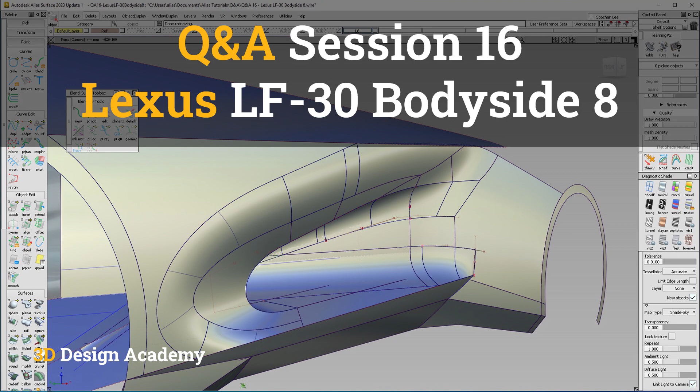In this lesson, we'll continue with part 8 of the body side of the Lexus LF-30 concept car. Okay, so in the previous lesson, I worked on this fillet over here. So let's go ahead and work on this one. What I'm going to do is take a little measurement. I think size-wise, it's pretty good. Let me just check a couple of images. Yeah, I think the size is pretty good for this one.

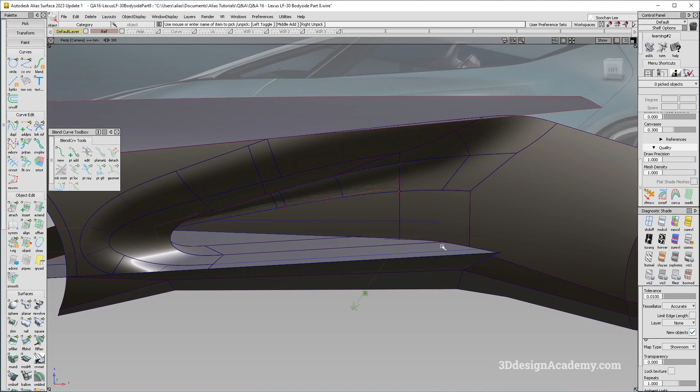So what I'm going to do is rebuild it, because right now you'll see that it's in multiple pieces. So let's go ahead and take a look. The information window shows it's 100 to 150. So that's what I'll do. Let's go ahead and delete this one, and let's grab surface fillet again. I'm going to make sure that this is untrimmed. I know there are several pieces because I was trying to do the fillets over here. Actually, you know what? I'm going to keep them just in case.

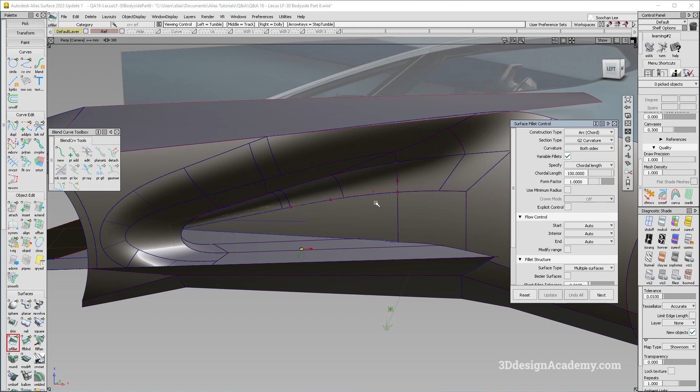First of all, I'm going to get rid of the COS over here. I'm going to grab a surface fillet over here. It's going to be G2 variable fillet. I'll start with 100 because it ranged from 100 to 150. I'm going to grab these surfaces over here and put that in. I'm going to make sure the direction is good. Right now it's set to auto. That's fine. It should actually be starting from here. I think I might have accidentally deselected this one, so let's do it again.

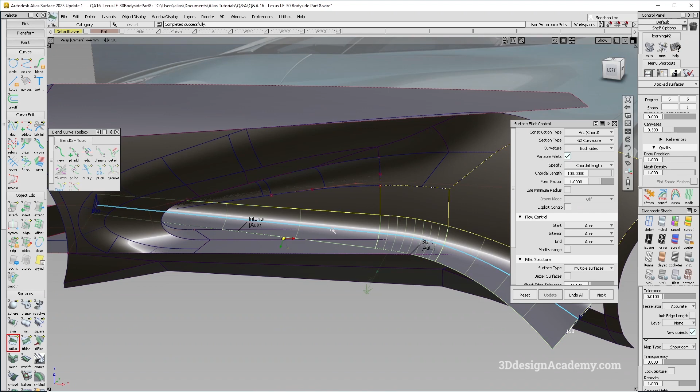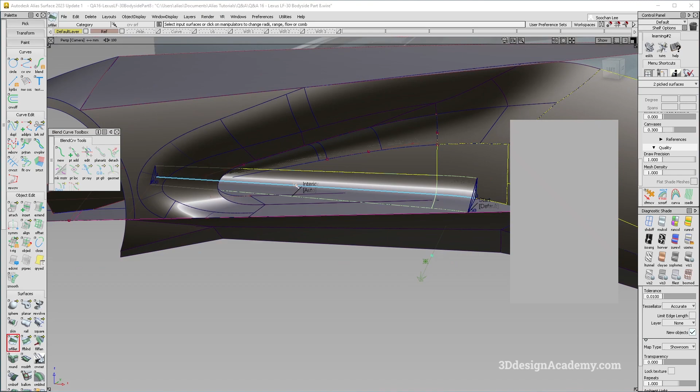Okay, so it's 100 there, and I'm going to put 150 over here. It's set to auto, that's fine. I'm going to change that to default over here, and change this one to default as well. Okay, so now it's one piece. Because I stretched it, and the 100 is all the way over here, I think it's actually a little bit larger, which is fine. I just have to make sure this one works over here.

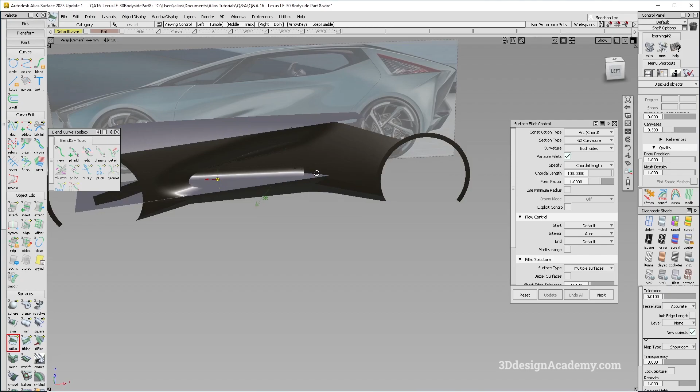Let's take a look. If this size works, I'll just proceed with it. Maybe it's not a bad thing that it's a little bit larger at the bottom. In fact, I might make it slightly bigger. I probably should have put a little bit of crown on this bottom surface. Right now it's probably almost dead flat. That was probably not the best thing to do. But I think it might not be a bad idea to make this one a little bit bigger.

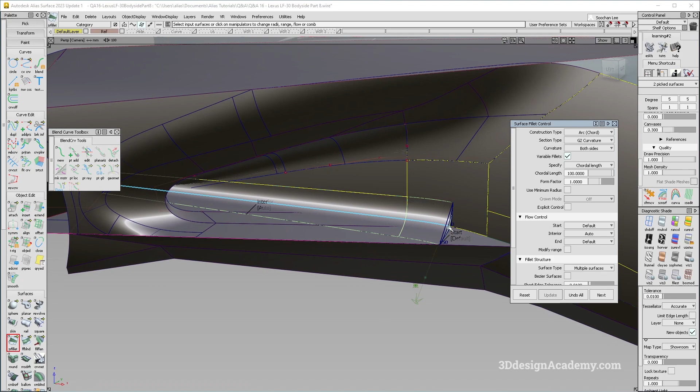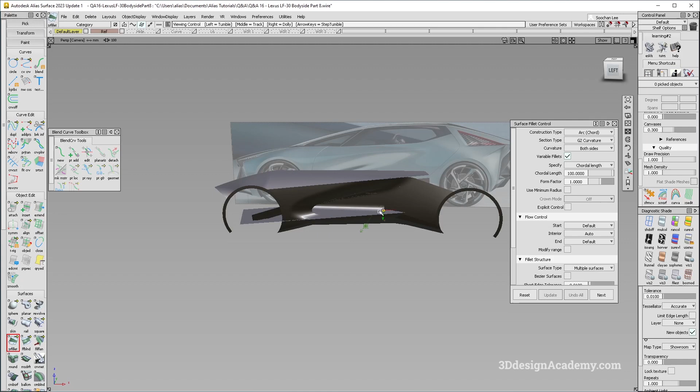I'm going to make this maybe 170, and increase this one to 120 over there. Yeah, I think that's a little bit better. Okay, that looks good. Should I make it a little bit bigger? Because the shader that Toyota uses is not as reflective as this, sometimes this makes the fillet look a little bit bigger. So I'm going to change this to shade sky analysis. Looking at the shade sky, I think this is pretty good, so I'm going to use that.

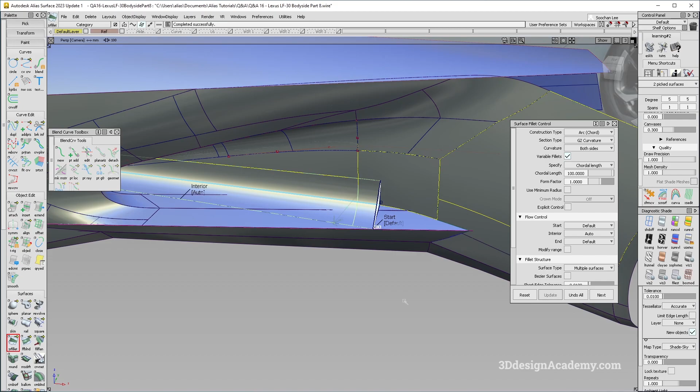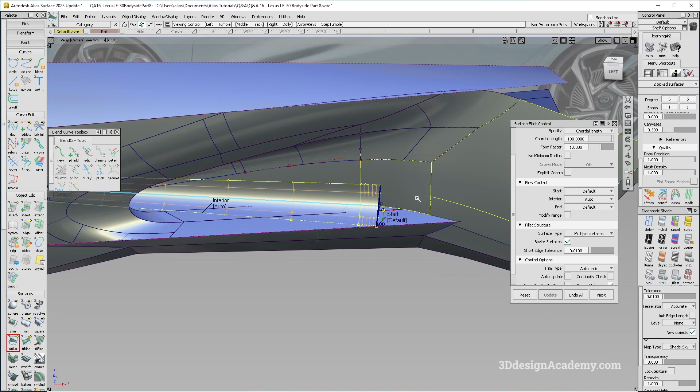Actually, I'm going to make this a little bit bigger, maybe 180 on this side. Yeah, I think that's pretty good. All right, before I start, it's in two pieces, which is good, but I'm going to do Bezier just to make sure the CV structure over here is good. That still keeps it in two pieces, and when I extend this one, that's going to make a better result. So I'll keep it this way.

Let's go ahead and delete the construction history over here. I'm going to extend this piece over here, so I'll just do an extend with merge off.

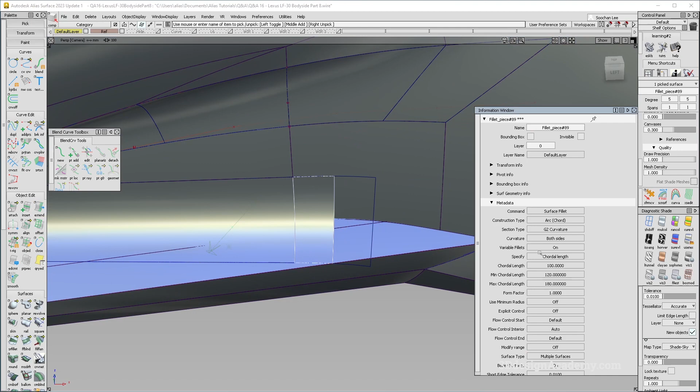And I'm just going to extend this one like that. Ooh, that's no good. Okay, so even with Bezier, looks like it's still stretching in a little bit weird fashion, which is okay. It's just not great. So I'm going to use a little bit different technique.

So first of all, let me just stretch this over here like this, and I'm just going to grab a degree 2 curve over here, and I'm going to align this one over here like this, and I'm just going to make it a G2, and I'm just going to rail it over here. So let me just grab these two over here. And actually, you know what? I think I'm just going to stretch it all the way through here.

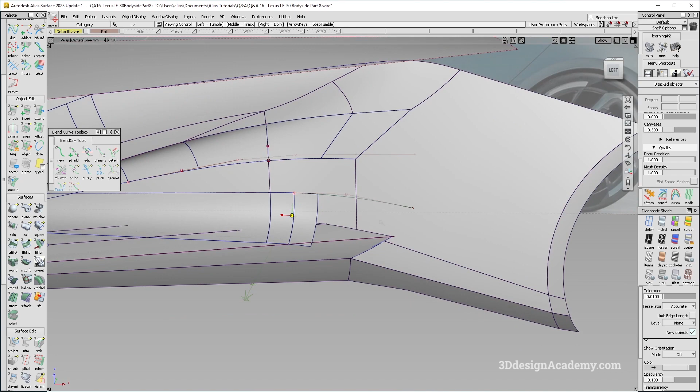Now, because this piece probably needs to be a little bit flatter, you can probably make the adjustment too, or you can just pull the CV a little bit so that it's a little bit larger. You can do that. Really depends on what you want to do. It's really up to you. Now that's it. However, let's go ahead and do this.

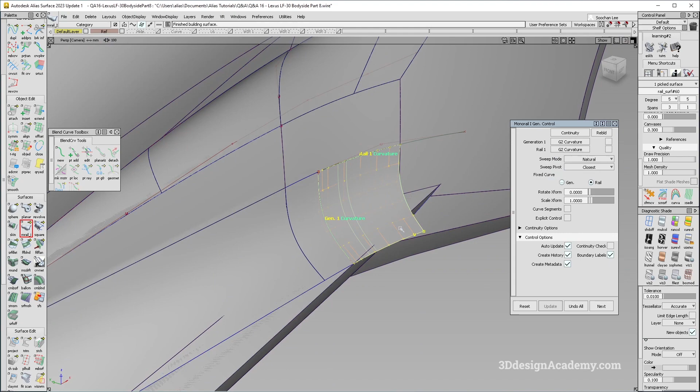So what I'm going to do is, instead of using stretch, I'm just going to do a rail. So I'm just going to grab this one as a position, or gen, I should say. And I'm just going to do that as a rail, and I think that looks good. However, I'm just going to make sure that it's curvature over here. It looks like it's doing a little bit of... I don't think it's continuous right there, so I'm just going to make it a degree 5 on both sides.

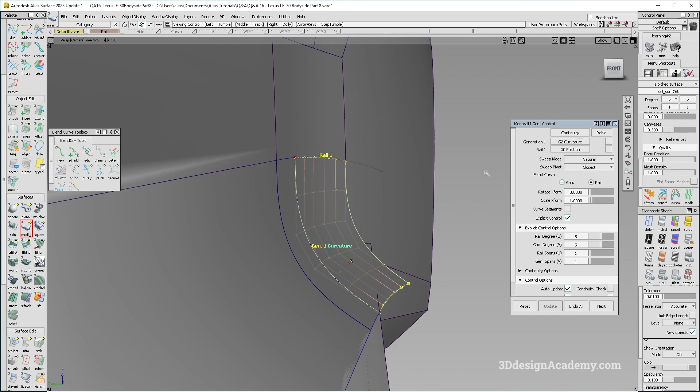Okay, and let's see what the CV structure difference is. Okay, so you'll see that this dips down a little bit. So I think it might be a better idea. Let me just make this both position. I'm just going to set rail as curvature and see how much it differs by. Okay, so setting this up as a curvature over here is good. However, I think this one is starting to deviate a little bit.

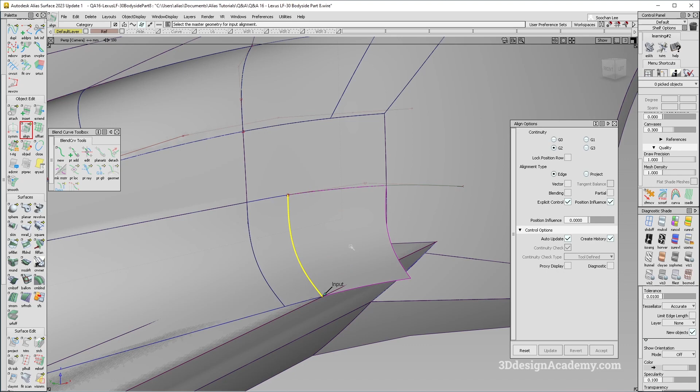So what I'm going to do is I'm just going to grab this one over here, and I'm just going to align it on this side. I'm going to make it curvature, and let's do this. I'm going to say position influence set to max, and I'm going to turn blending on. It's going to be 1, 2, 3. And I'm going to probably have the blend factor of 0 so that everything seems a little bit more gradual. I think that looks pretty good.

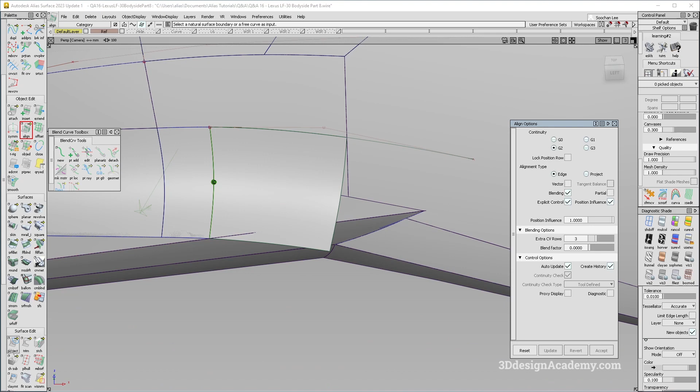Okay, so now what I'm going to do is I'm just going to line this up. Before I line it up at the bottom, I do need to trim convert it. So I'm just going to project it normal like this. And I'm just going to do a trim convert over here. And I'm just going to get rid of this one. And that looks good. And I'm just going to align position over here.

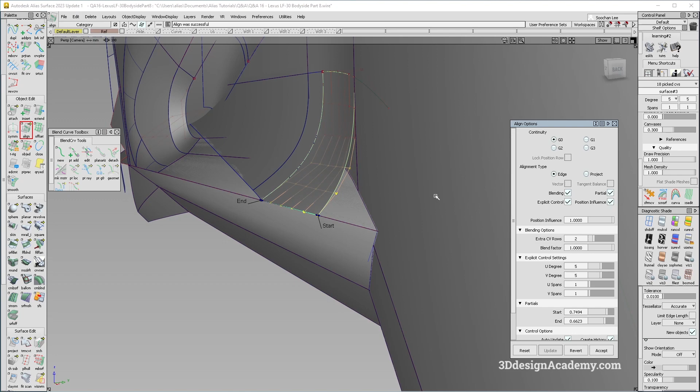Like this, I'm going to say partial. That drops it down. Blending will also need to be turned on. Blend factor extra CV rows of 2, blend factor of 1. And that should be pretty good.

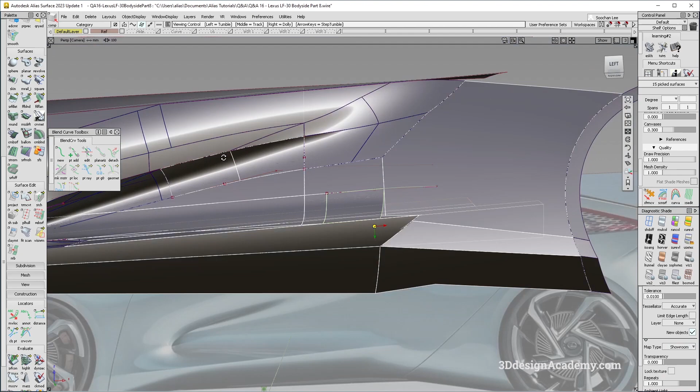Now that's it. However, this alignment wasn't good, so I'm going to, well, actually it was curvature, so yeah, I think this should be okay. Oh, actually, you know what, we got curvature on both sides, and that's good. Highlight looks good. Let's actually go back to showroom. I think that looks pretty good. Okay, so now I'm just going to delete the construction history.

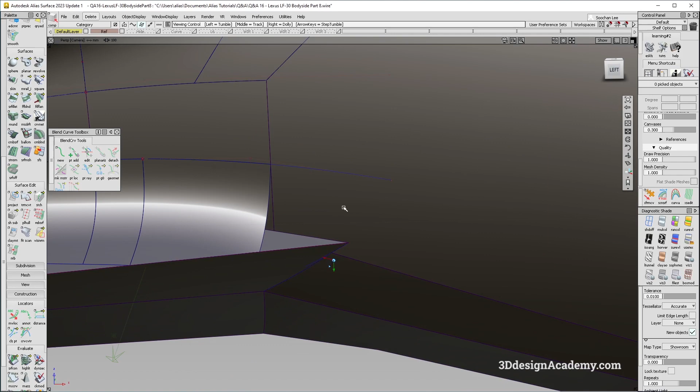Now that's it. However, this piece over here, I can do it hard edge. Actually, you know what, let's figure out the fillet size. Actually, it doesn't look that big. You know what? I think I'm just going to fill that in. However, I will need to do a fillet over here. But let's go ahead and do this first.

So what I'm going to do is I do need to set up a curve for the 4th edge. And I'm just going to snap it over here like this. And then maybe I'll just project it like that.

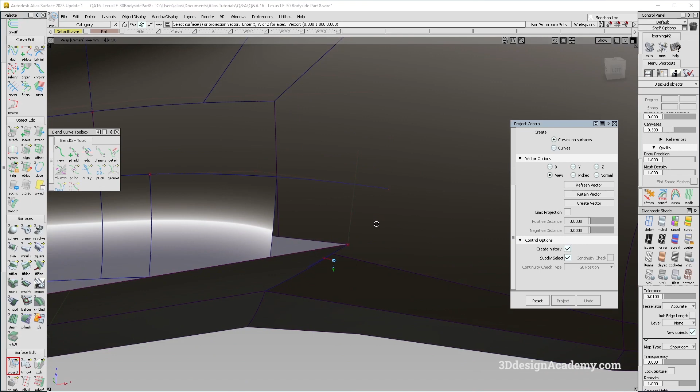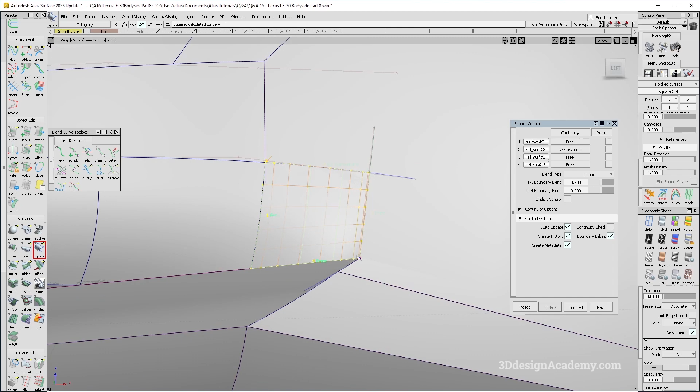I'm just going to say view should be okay. And I'm just going to go ahead and use a square again. So it's going to be 1, 2, 3, and 4 over here like that. Okay, so 2 is going to be curvature. Unfortunately, side 3 will stay positioned because I will need to put a fillet over here. There's going to be a fillet over here, and there is going to be a fillet over here. So side 3 will remain in position.

However, side 2 will be curvature. And let me just turn on explicit control. Oh, that looks good. And 1 is also going to be curvature. Looks like there's a little bit of failure. Free. Oh, actually, I'm going to leave that on. Free boundary. Looks like there's a little bit of a movement, but it's not too bad. So I think it's just a matter of getting those lined up.

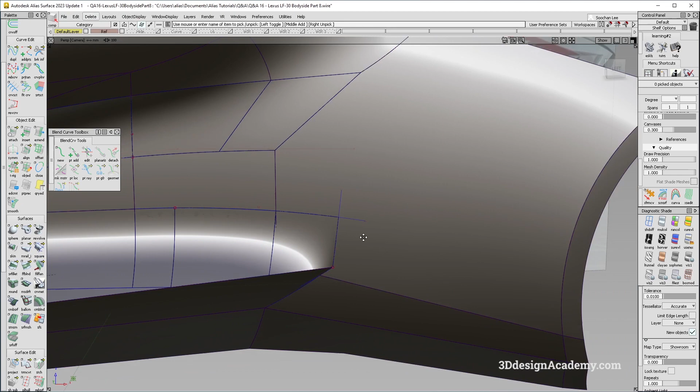I think the highlight looks pretty good, and once I put a fillet over here, I think the transition should be pretty good. So let's go ahead and make sure the continuity is good. So I'm just going to delete the construction history over here, and let's just trim this for now. Now I did separate this over here. I wish it did it with just a line up, but it looks like if you see the highlight over here, it didn't quite do that. So, well, that's okay.

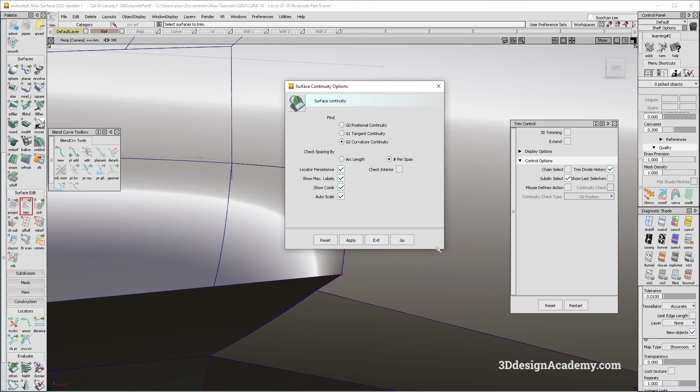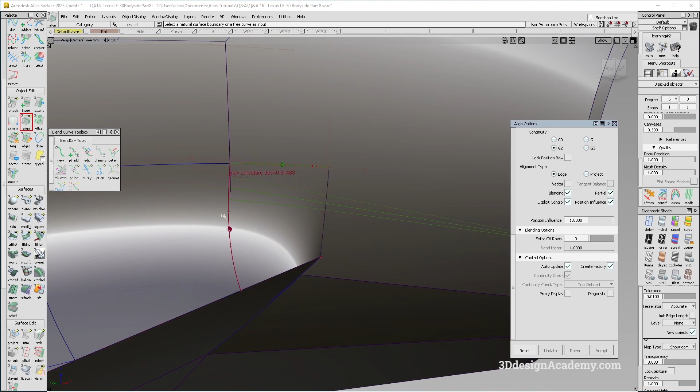So let's go ahead and check, get the surface continuity checker, and I'm going to line it up over here. And here it looks like it's just a matter of getting curvature continuity to be corrected. So let's go ahead and grab align. And I'm just going to start with G2 over here. And that does fail a little bit more. So I'm going to say vector, nope. Explicit control. Okay, so let's try this. I'm going to align this one because it has a little bit more deviation. Okay, so it looks like that might be a little bit better. Well, yes and no.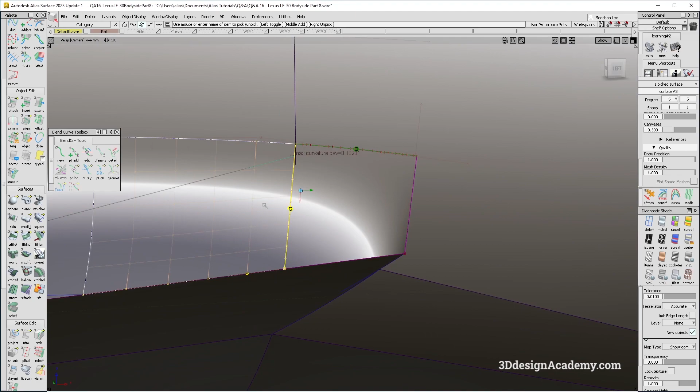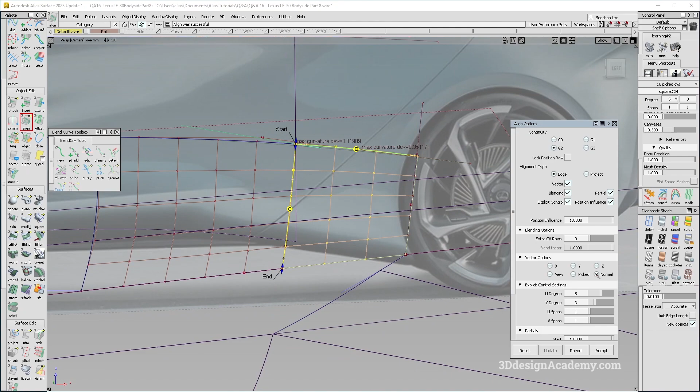So if I have the CV structure like this, which, to be honest, it's not to my liking. Looks like it actually gives me a little bit better structure, but I wonder if it's really worth it to change this. What I could do is I can try to just do a rebuild over here. But, well, let's do this. I'm going to try without. And let's take a look. So I'm going to say vector. Say normal. Saying normal is a little bit better.

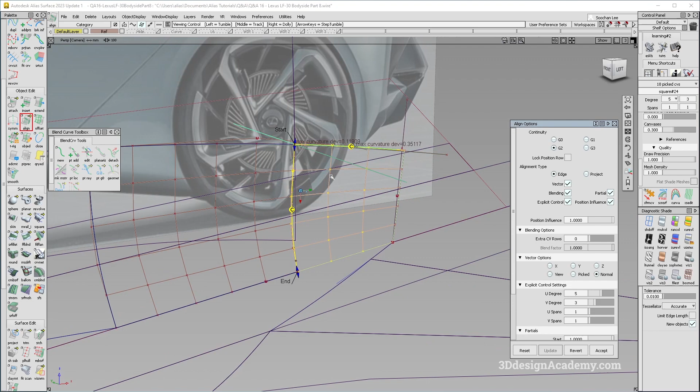Okay, actually, you know what? Before I do that, let me just revert it so that I have a copy. So I'm just going to copy and paste, put it in hide, just in case I need it. And let's go ahead and align this one over here like this. And I'm going to say vector. Okay, and what I'm going to do now is I'm just going to delete the construction history over here, and I'm just going to try to line these up. So first of all, let's do this side first because it's got a little bit more deviation.

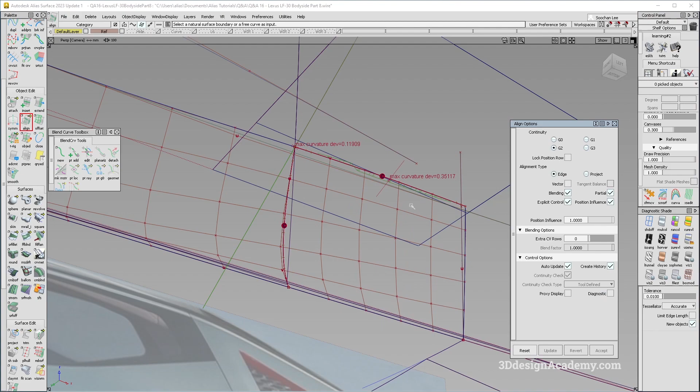Now, of course, I could make it into degree 5. Well, let's do this. Actually, you know what? Let's just do that. Degree 5. Let's make our life a little bit easier. Still should be a good surface over here. Okay, so it's still deviating by 0.6. I'm going to say vector. Nope. That doesn't really have any effect. I'm just going to align this one over here. I'm going to say vector. Okay, so looks like deviation amount is a little bit smaller.

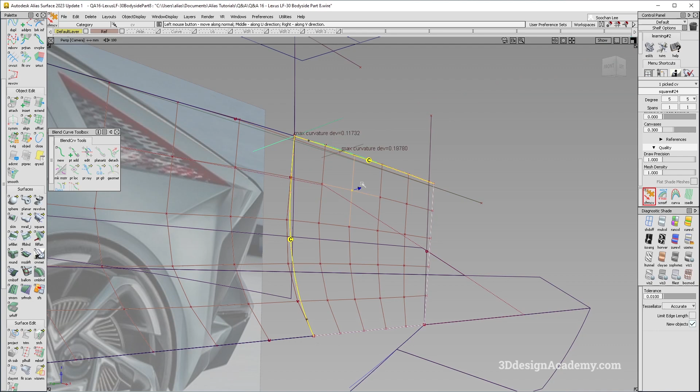So I'm just going to go ahead and delete the construction history. Let's grab this CV over here, and it's going to be NUV. I'm going to say 5,000. Let's just try. Ooh, that's no good. I got curvature here, but it's failing over here. So I'm going to try a little different CV, a little different location. So that's 1.0. Now this probably has to do with the fact that some of the surfaces are a little bit flat. That makes it a little bit difficult.

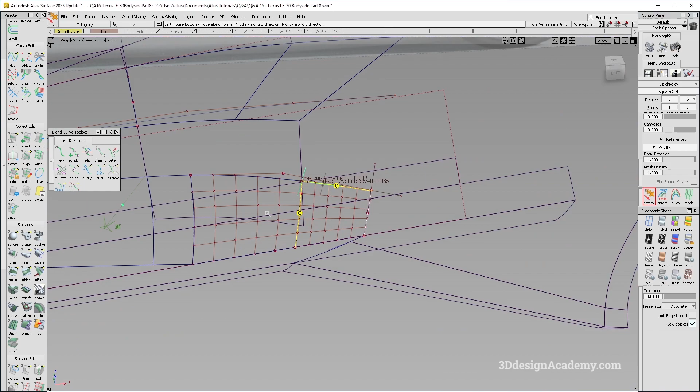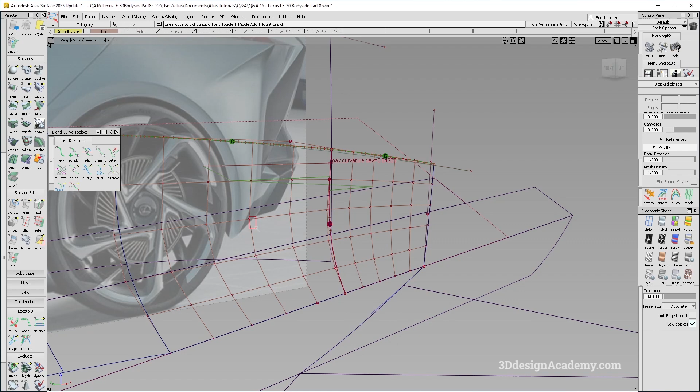Okay, so let's grab the CV and see if I can. Actually, technically, I'm supposed to be aligning this one to this one, because this is essentially a primary surface. So maybe I'll just do that. Okay, so let's align this one first. So you'll see that there is a deviation. So I'm going to just have curvature on over here. I'm going to delete the construction history over here, and I'm going to grab this one. Actually, I should probably grab this one over here. And let's see if this works.

Okay, I got it a little bit closer. But since it's turning to 1.0, I think I probably need to control some of the CVs over here. So let's do this. I'm just going to grab the position over here. It's not really letting me. Okay, so let's grab this one. See if I can make a little bit of adjustments. 1.0.

1.15. Just going to try and grab CVs here and there and just try to get it a little bit closer. So it looks like it's seesawing here and there, which really shouldn't be doing that. It shouldn't just pop to a point. Oh, there we go. 0.12. You see that it just pops right away to 1.0. That's not supposed to be like that.

Okay, so I'm just going to grab this one. You know what? Let's just leave it. I'm going to just pick a couple more CVs to see if I can get it to where it needs to be. But it looks like none are good. Okay, well, it's close enough, I would say. So unless some of the CVs on this side help me get there, let's see. Since it's a little bit sensitive, I'm just going to crank it up all the way to 500,000 and see. 0.12.

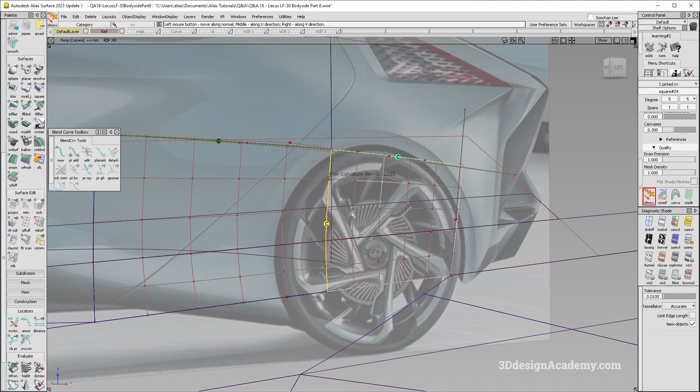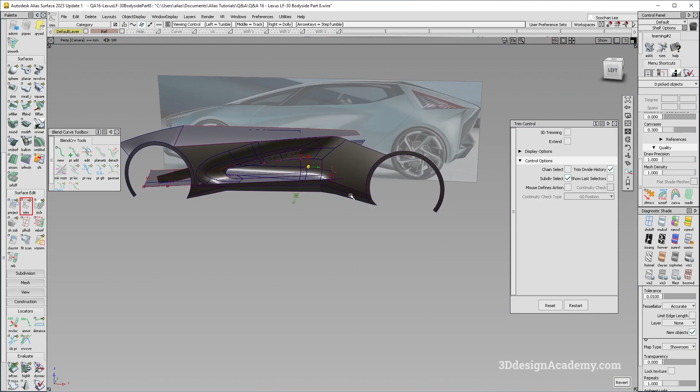Yeah, okay, you know what? Let's just leave it like that. Unfortunately, I think that's about as much as I can get it to. All right, so that looks pretty good. Highlight looks pretty good. So I'm going to go ahead and just trim this piece over here. And next up, I'll probably have to do this one, and also this one.

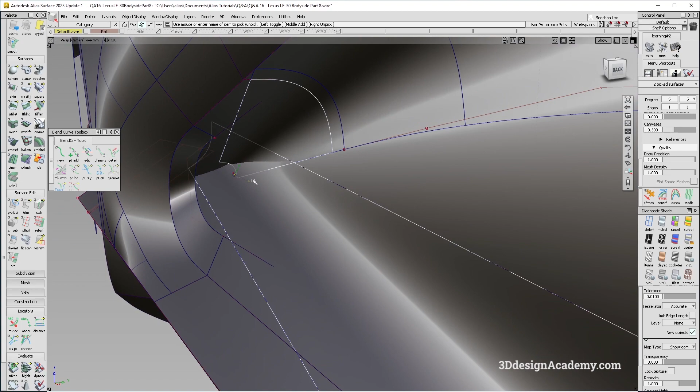Now this is a Y fillet, so it's going to be a little bit complex. But since there is a little bit of size difference between the two, and since this is a lot bigger, I think I'm probably just going to do this on top of it. So instead of doing a traditional Y fillet with different size, I'm going to try to stack on top of it and see how that goes. So let's go ahead and do that.

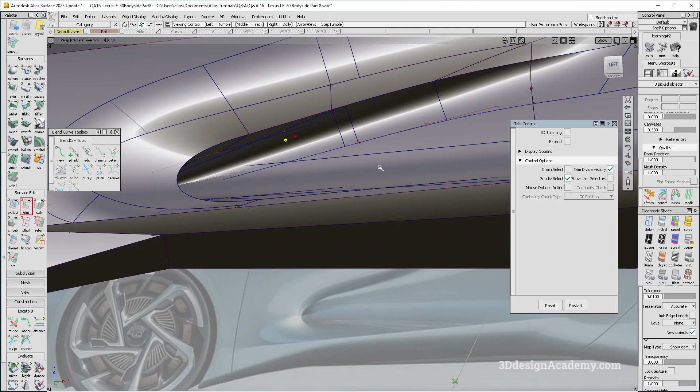So first of all, this one, let's go ahead and just trim it. Actually, you know what? Let's not trim it. However, I do need to trim this, like that. And I'll probably have this just flowing on top of this one. First of all, I'm just going to do an insert. Actually, instead of doing an insert, I'm just going to chop this into two. However, I would like a copy, so I'm going to copy and paste, put one over here. And I'm just going to do detach over here.

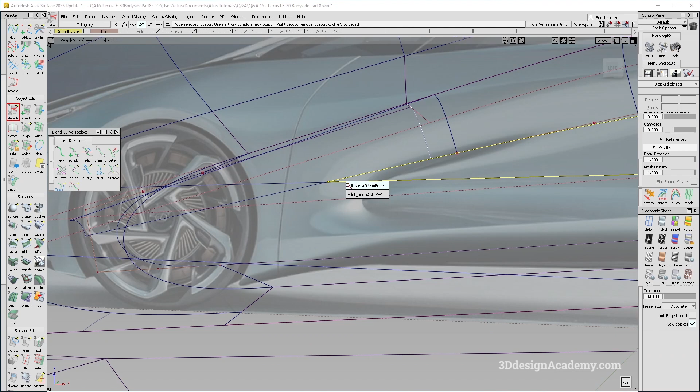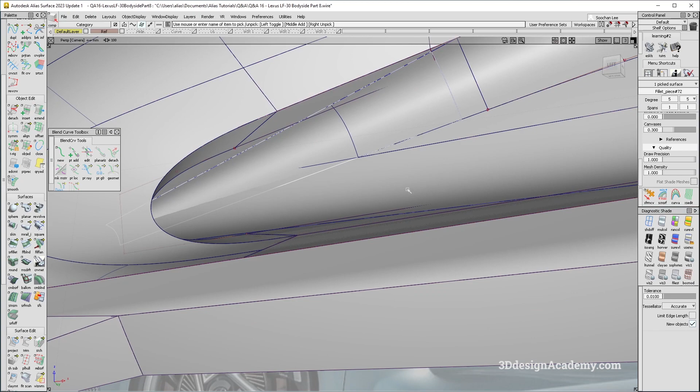Just going to snap it over here. Oops. Looks like it won't snap over here. Oh, that's really annoying. Okay, that's fine. So let's do an extend. I'm just going to turn merge off. I'm going to extend this piece over here up to this point, which snaps. Okay, so let's go ahead and get rid of this one. Actually, I wonder, this does need to climb onto this side. So let's just delete it for now.

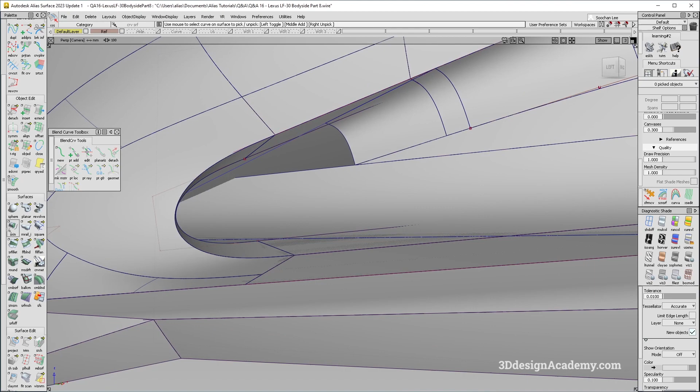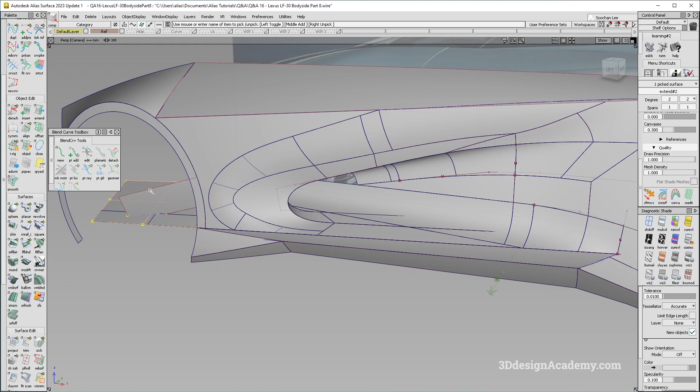I'm just going to grab a surface fillet over here. This is a tricky thing about variable fillets. Because the size is a little bit different as it goes towards the other side, it's going to be a little bit difficult to match everything. First of all, let me just trim this out. So I'm just going to say extend, and trim that. This piece over here I no longer need, so let's just go ahead and hide it. Same thing with this one. This one, hide it. And let's take a look at this one.

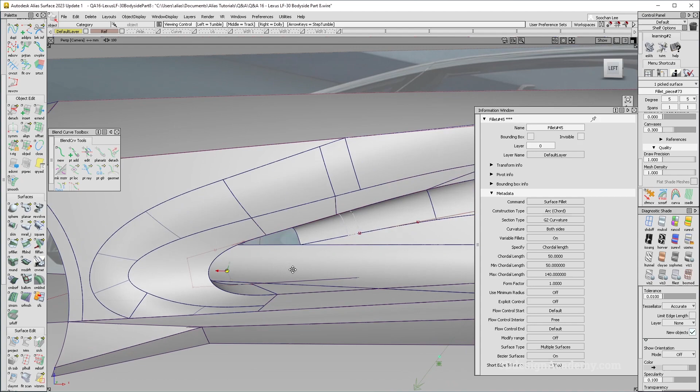So what I'm going to do, I probably should have built this one as, well, let's see. So this one, okay, so it's a 50 and 140. Let's see if I can replicate this. So I'm just going to grab these ones, including this piece over here, and I'm just going to see if I can just reenact it. So I'm going to say copy and paste, 50 and 140.

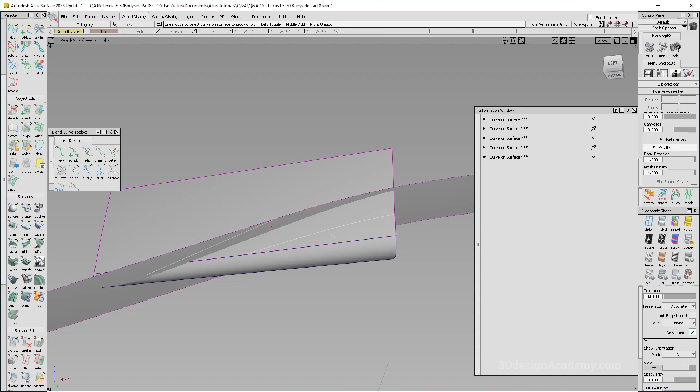So I'm just going to untrim this piece over here like this, delete all the COS, say variable fillet, grab these ones over here. So variable fillet, I'm going to say 50 like that, and it's going to be 140 on this side like that, and that's what I get. Now my question is, is this going to be the same shape? I'm not sure. So first of all, I'm just going to turn Bezier surface off, and that looks a little bit ridiculous to be honest.

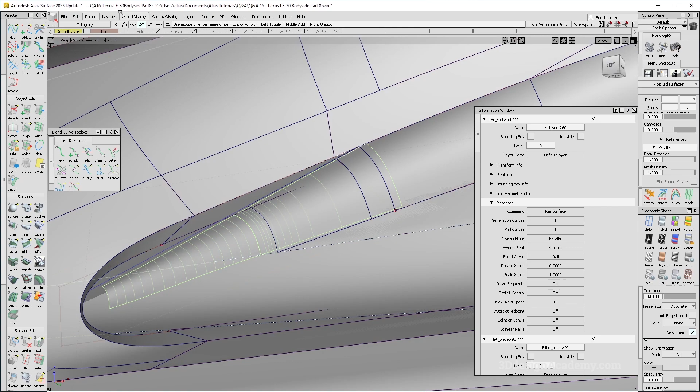However, what I'm looking for is just a path. So I'm just going to see if this matches the profile of the one that I built previously. And looks like it doesn't. So what I'm going to do is, unfortunately, this makes it quite a little bit more complicated. I'm just going to delete it. And I think I'll probably have to just manually build it. All right, so let's do this.

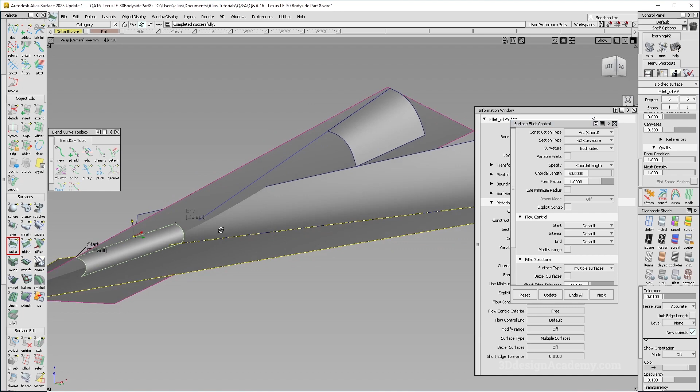I'm just going to set up a fillet over here. Let's do this. I'm just going to do a surface fillet over here, and I'll probably just match it over here. So I'm just going to make a 50 over here like this, and I'm going to see how it does with a fillet. Oh, actually, not exactly a fillet, just a blend curve. So I'm just going to do this one over here, do this one over here.

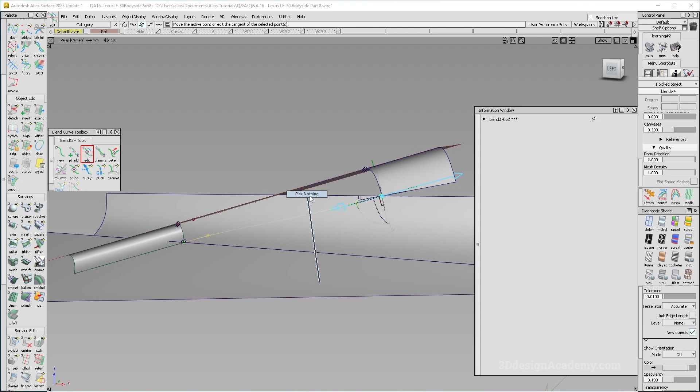If the flow seems natural, that's good. But as you can see, it's not. So I'll have to do a little bit of adjustment there. So I'm going to do the same thing over here. And let's just do an edit over here like this. Oops. And as you can see, the CV structure is going a little bit different place.

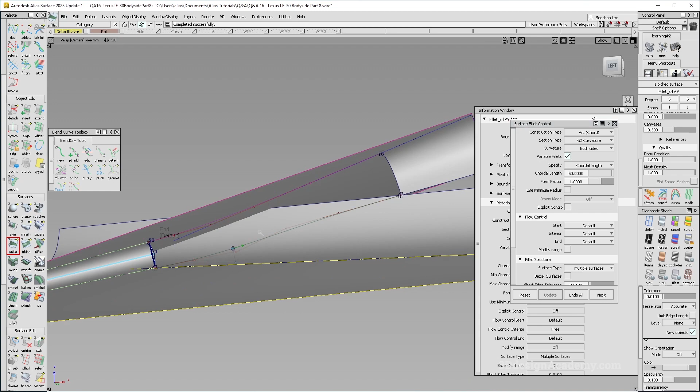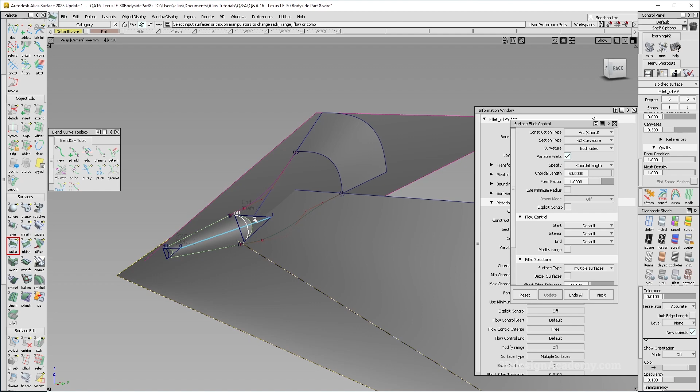So what I could do is I can do a variable fillet on this one too. So maybe I'll do 50 there, and maybe I'll just make this into 30 like this. And I'm just going to try to get the structure to be somewhat similar so that it flows nicely. Now it is going to be like this on this one, just because of the imbalance I have. Actually, if this is the case, I'm wondering if it might be better to just, you know what? I think it might need to.

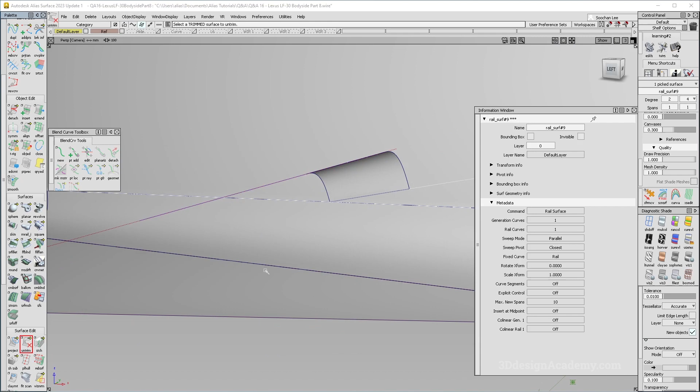Okay, so let's just delete the curves over here, and I think I might have to just go back to the theoreticals over here. So I'm just going to grab this one, this one, this one, this one, this one, and this one. So these surfaces over here, I'm going to say hide unselected. I'm going to say untrim. So basically get back to the theoretical on this side, and get back to theoretical on this side like this.

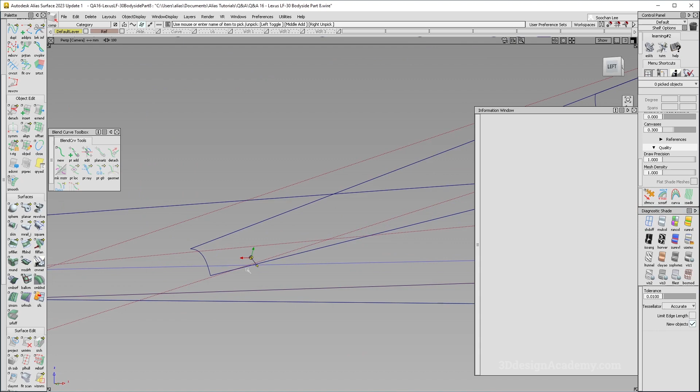And now I'm just going to bring the original fillet back, and let's grab this one. I'm going to put it back in here, and I'm just going to see where it ends up. That's where it's going to be placed. So let's go ahead and extend this one back a little bit. And I'm going to make a fillet. Actually, let's put this in a new layer and just hide it temporarily. And I'm just going to put a fillet over here that's based on this size. So that's good. The flow is going to be good. Now I don't know how this is going to work, but let's take a look.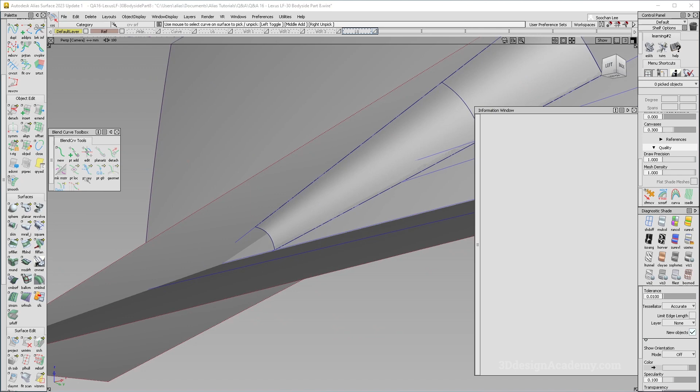So let's see, I'm just going to do an intersect over here. It might be a little big. Let's take a look. So what I'm going to do is I'm just going to duplicate this edge over here. It looks like it's just a flat surface, so the intersection is also flat. I'm just going to place a curve over here. And basically that is where the curve, or the tangent line, is going to be. So I'm just going to project it there.

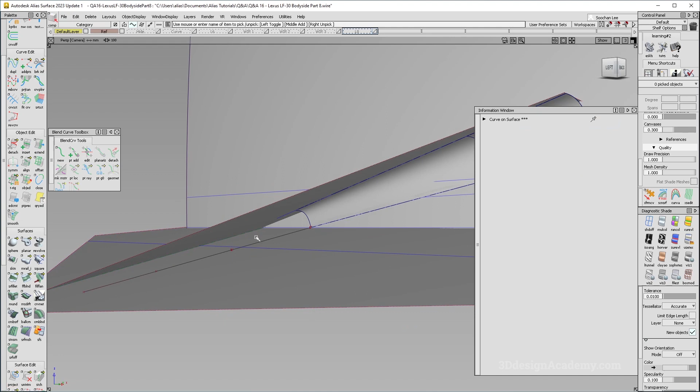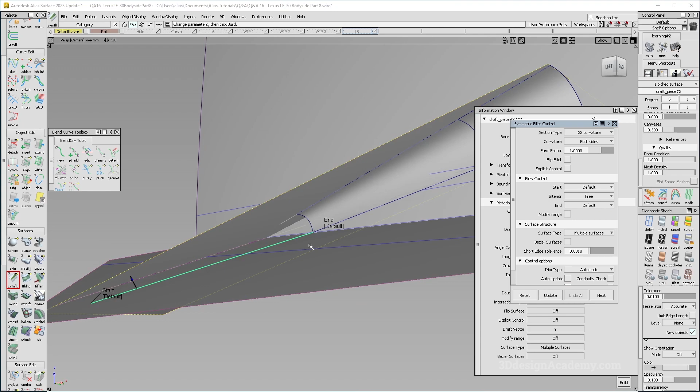And to get a similar setting, I'm just going to use a symmetric fillet tool. It is going to be G2, and I'm going to say both sides. Form factor will be 1, and everything else is going to be just default. I'm just going to click this one, accept, and I'm going to click the second surface where it needs to reside. I'm just going to make sure the direction is good, and that's good over here.

So basically this is where the fillet is going to be. I'm just going to stretch this back out, and that's how the fillet is going to look, or where I'm going to set the edge. So I think that should be good, and I think that should be good over here. Okay, so let me just delete the construction history.

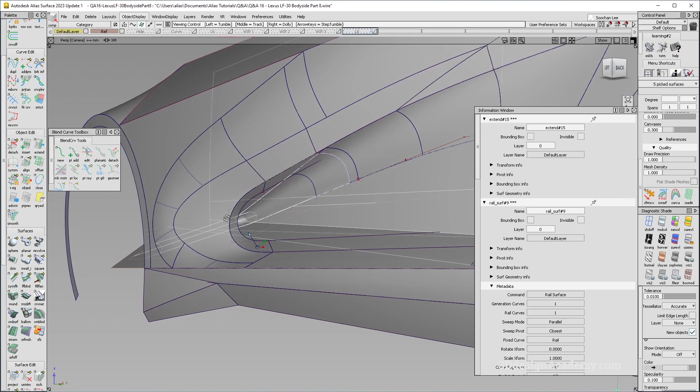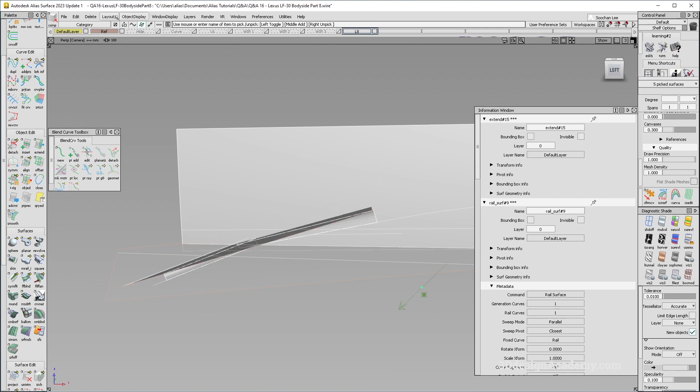Actually, if this is the case, I'm wondering if I can just make a ball corner. Maybe I can. Yeah, maybe I can do that. So maybe it'll be sort of like a ball corner kind of setting. Okay, so let's try that. Actually, you know what? This might be a little bit more complicated and might take a little time. Oh, where did this fillet go? Let me just make sure that I have this one. There we go. And I'm going to try making a ball corner out of this. If I can succeed with just the ball corner tool or the corner blend tool, I'll just leave it. If not, I'll try in the next lesson.

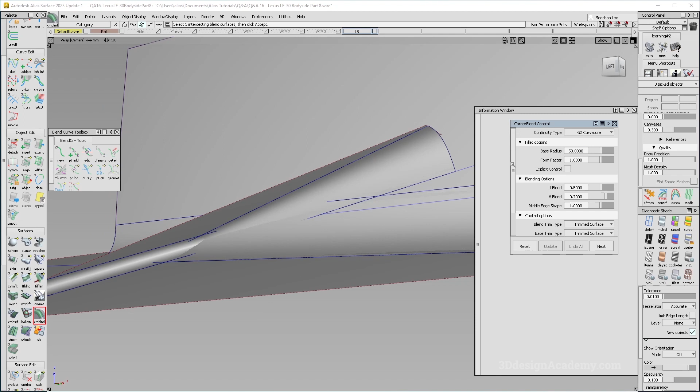Okay, so I'm just going to set it to curvature, and this probably needs to be a lot bigger. So maybe I'll just make the base radius 50 to start with. I'll click this one, and this one. Just going to click on this edge. Oh, it does make it. Okay. So base radius does have to be a lot bigger. So I'm going to say maybe 200. Even bigger than that, 500. Maybe 1,000. Okay, maybe not 1,000. Let's start with 750. That actually looks pretty decent.

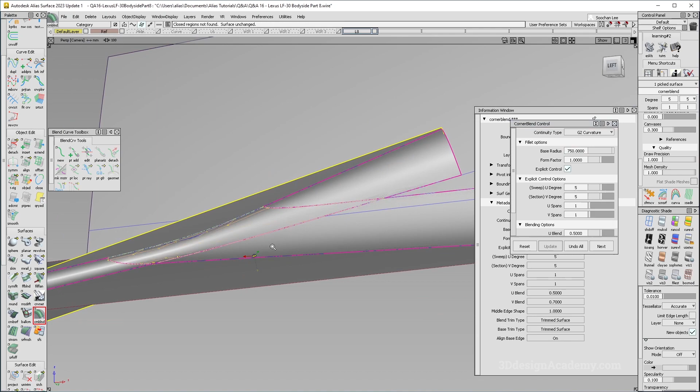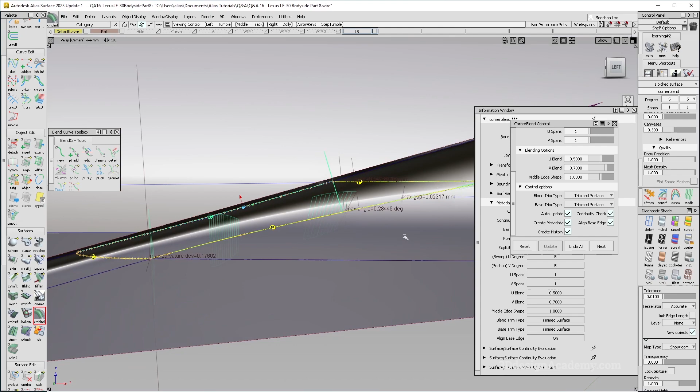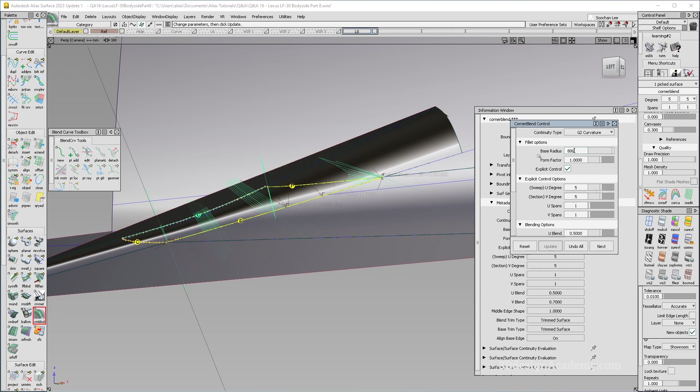Okay, so I'm just going to take control. CV structure is, to be honest, crap. But let's take a look at the highlight. The highlight's half decent. Yeah, I think that's not too bad. Okay, so I'm just going to check the continuity, however. Oh, wow. Okay, so it looks like it's actually failing position. That's no good. But since I have the building blocks, what I can probably do is make this into a trim converted surface, and that actually might work. Okay, so still failing. What I'm going to do is change the size of this one. 800, still failing position, tangency, and all that stuff.

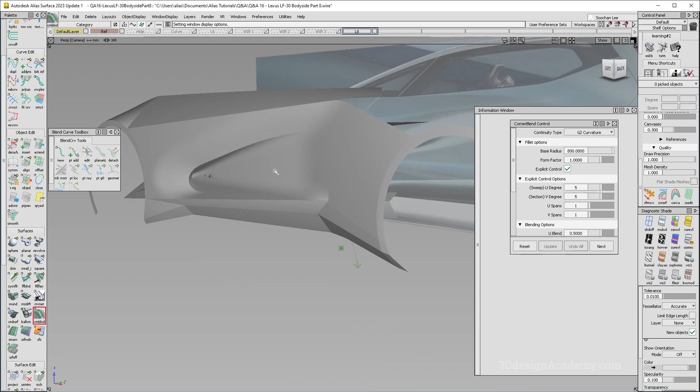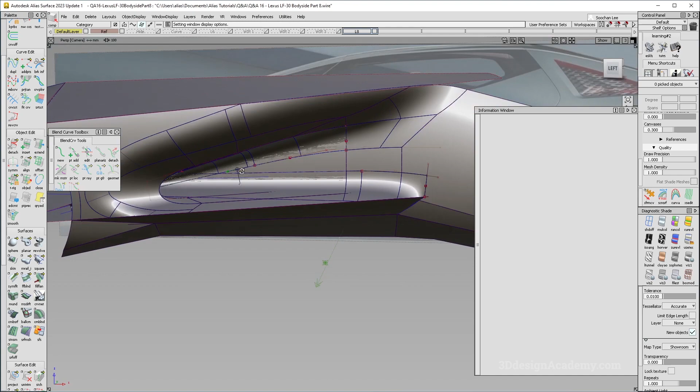Okay, so let's do this. I think I see a potential for this to work. And let's just make sure that the highlight looks pretty good. Yes, I think I can probably just leave it as is, to be honest. The continuity is failing, but in the next lesson, I'm going to make sure that works and the continuity is corrected. It's not great, but I do see a good potential for this. So it's not going to be exactly a Y fillet, but it looks like it's actually going to be a ball corner because of the fillet I set up over here. I do feel like it's a little bit more controlled. So we'll continue this in the next lesson.